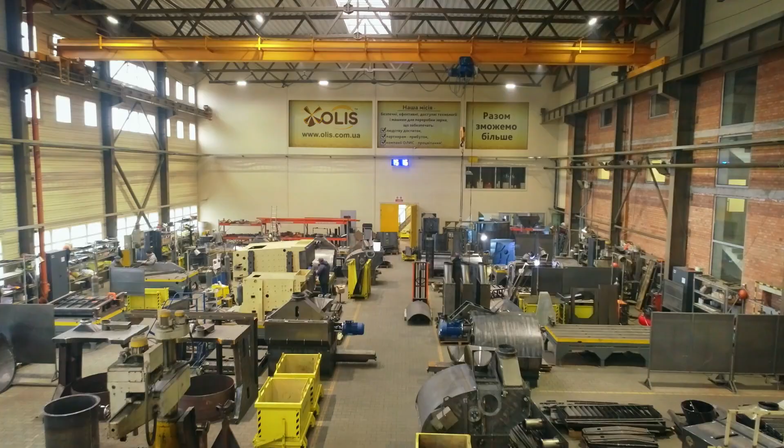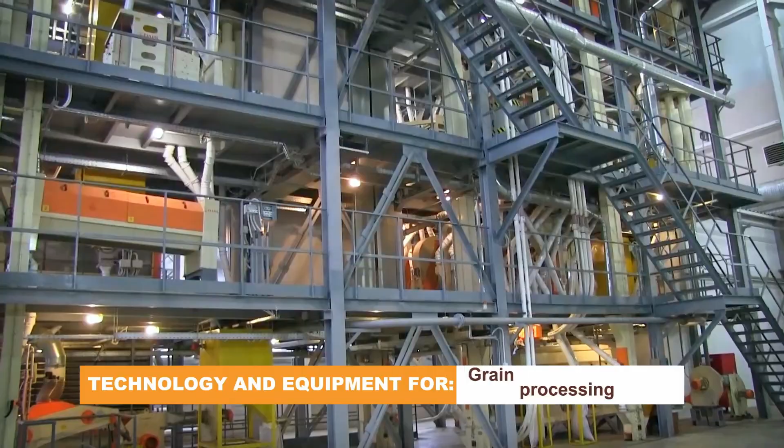The OLIS Company is the leading supplier of modern technical solutions to the grain processing industry. We design and deploy technologies and equipment for grain cleaning and its processing for flour and groats, as well as laboratory equipment for determination of grain quality and grain processing products.

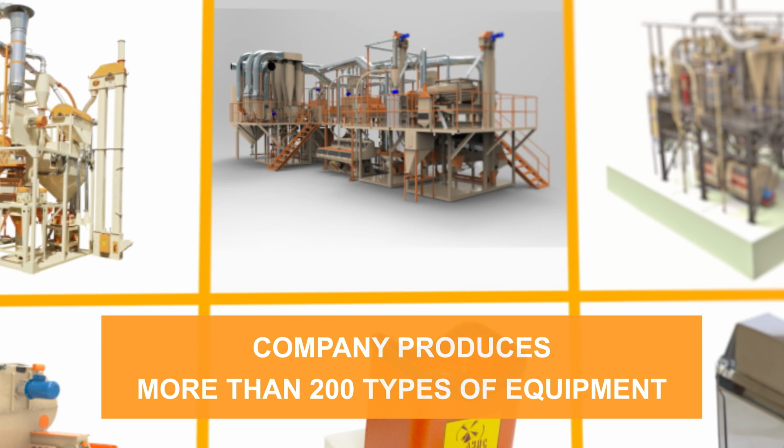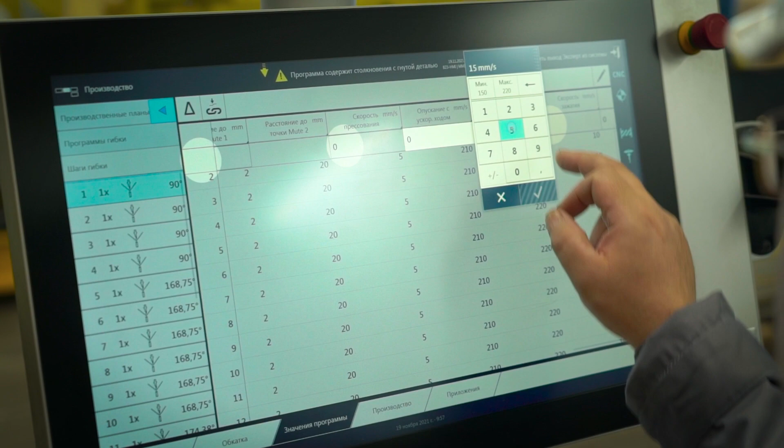Since 2005, the year of the company's establishment, and until the present time, the company has been producing more than 200 different types of equipment that are used by more than 3,000 enterprises around the world. Our enterprise uses the latest technologies and the most modern equipment in all stages of production.

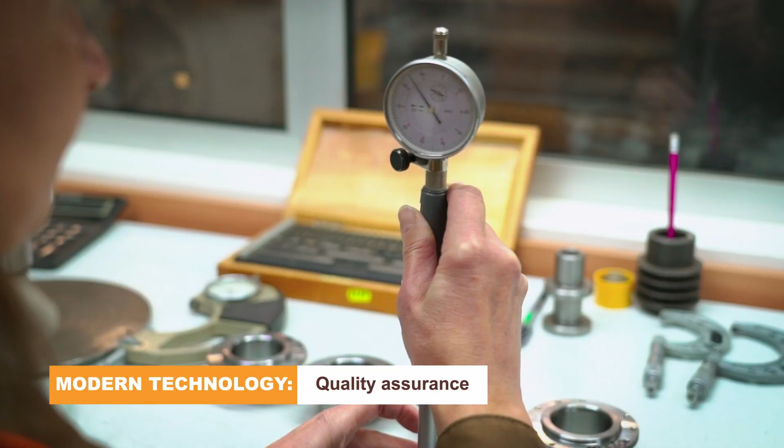The main advantages of our approach are high quality and reliability, as well as functionality and efficiency of finished products.

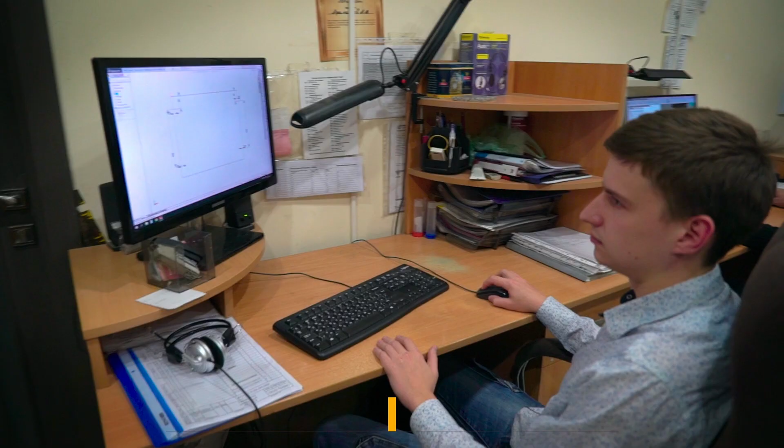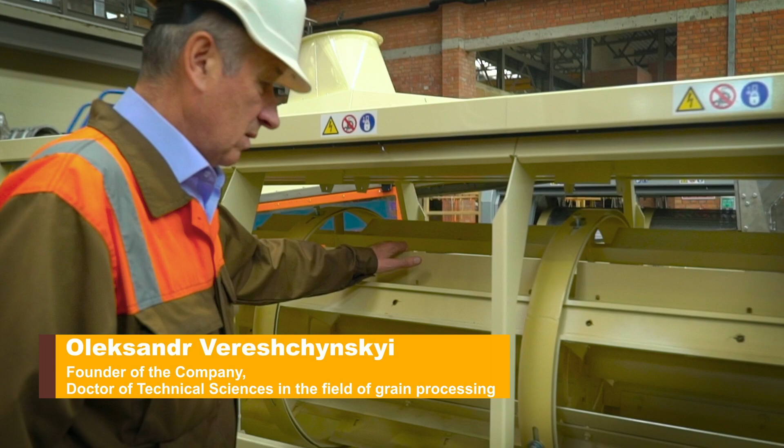The identifying feature of the company's activity consists in the scientific and innovative approach, which begins with the founder, Oleksandr Vereshchynskyi, the Doctor of Technical Sciences in the field of grain processing.

The company's brain is a creative team of grain storage and processing technologists and designers who work every day to develop new technologies and equipment and enhance the existing ones.

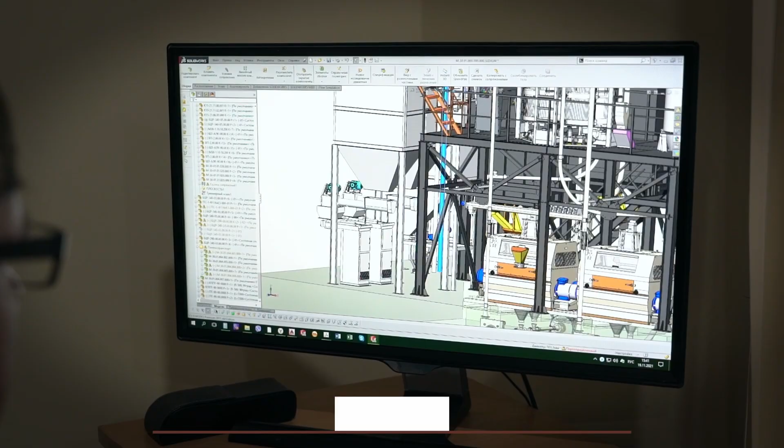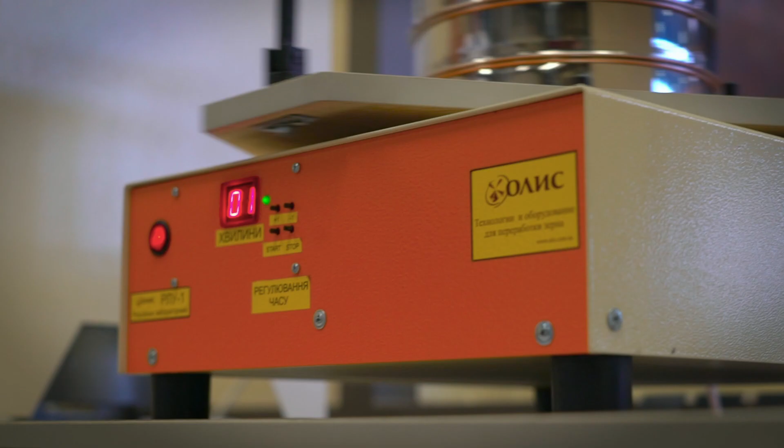Every problem solution begins with assessment of the quality of grain and processing products and modeling of technological processes in the laboratory of the Research and Development Center.

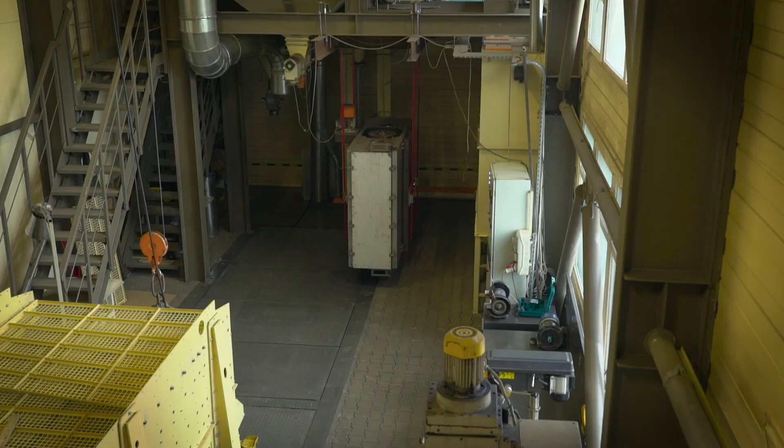Designing and modeling of technology and equipment in a computer-aided design 3D system, testing a prototype on a test stand in continuous operation mode, and then the equipment is launched in serial production.

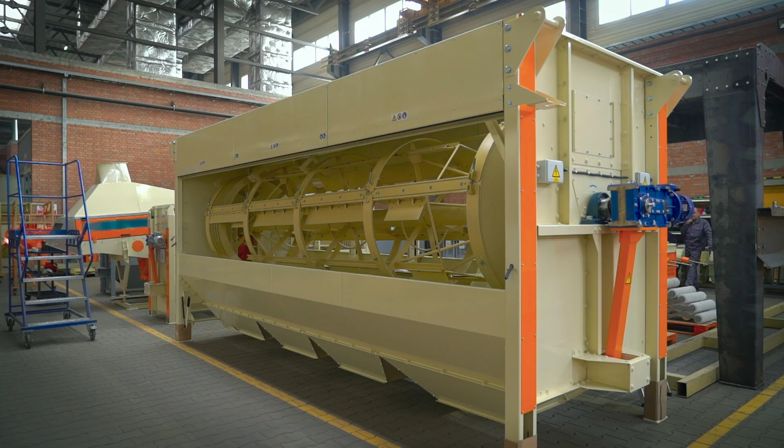But the main value of the company is, of course, people, since Olis is a real family.

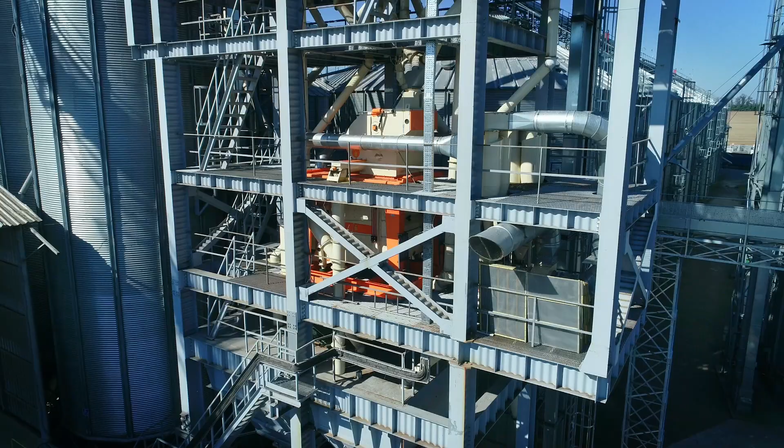Our team does everything it takes every day to make company products even more perfect.

Currently, this allows us to export equipment to more than 30 countries around the world: North America, the European Union, Africa, the Middle East and Central Asia countries.

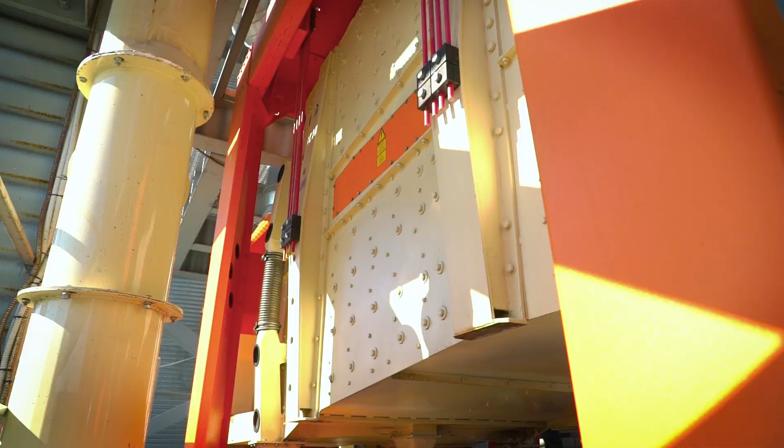Our mission is to create increasingly safe, highly efficient, accessible technology and grain processing machines, which will ensure food abundance to mankind, profit to our partners, as well as prosperity to the Olis Company.

Olis, your guide to the world of grain technology.